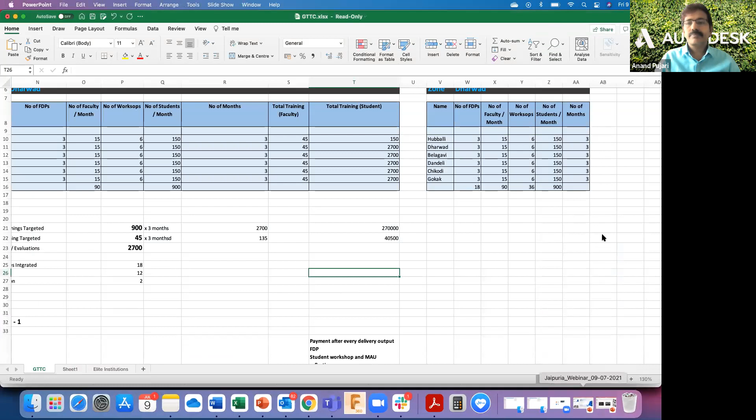Right, let me go to my presentation. Right, so my screen is on full mode, sir. Yes, sir. Yes, sir. Great, thank you.

All right, good afternoon. As many of you have just heard, Pritham sir has briefed about my profile. Again, I repeat, my name is Anand Pujari, and I'm education account manager with Autodesk right now. With this division, for the last 3 years, I'm working with the education community.

Prior to that, I used to work in a department called ADN, Autodesk Developer Network Group, where I used to manage the third-party partners who develop applications on top of our products, because you cannot get everything under one product. There are so many people who want to customize the product, increase the productivity, or enhance the approach towards the product. So all that is being taken care of by our third-party community. Having said that, we have some open sources that will be utilized by our developer community to develop on top of Autodesk products.

So in today's agenda, the whole idea was to look at it from a design thinking perspective and how additive manufacturing is being considered at the industry level. I'm not going deep into those subjects because I'm not that expert in those areas, but I will give you how I connect these areas, because you already might be knowing about the design thinking process and everything. It remains common, so we don't have to go into those areas. I'm pretty sure you might be knowing about additive manufacturing as well, from where it started and where we stand. But what I'm trying to give you is an overall view of how the perception of the industry is changing with respect to these two areas or topics.

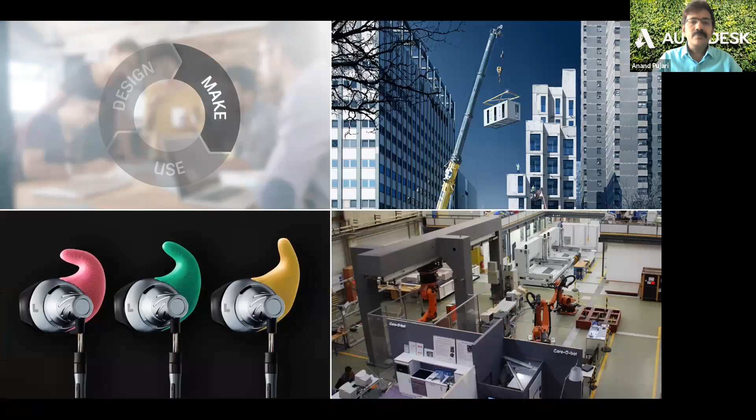Let's shift focus a little from the make, and what is happening in the make industry. We all are seeing this - many major cities are building roadways and highways very fast, especially with metros coming into picture. The construction industry is booming, and structures are coming up fast in less time. Now how is this happening? What is the makeshift, the change in the transition?

We are moving from a traditional approach of building everything on site. Gone are the days - now we are not going to start the structure completely from the base on site and keep building on that. That is the biggest shift.

If you look back 10 years, if a metro was built in Lucknow, or metros in Delhi, Bangalore, Hyderabad, or Chennai - previous projects took almost 6-7 years to build something like 5 or 10 kilometers of metro rail. Now it just takes months to build 10 kilometers of such things.

Why? Because the change in the make is happening with respect to prefabricated things. Everything is prefabricated now - that is the shift, the transition happening in terms of make.

Now the make, and any product, is coming so fast to the market because you don't have to build a huge factory - micro factories are coming into picture. People who are crowd-funded benefit as micro factories emerge, and that's where the make is changing. Then additive manufacturing, robots, and drones are coming in - I'll talk about those as well. These things are making production very fast, and products are reaching the market very fast.

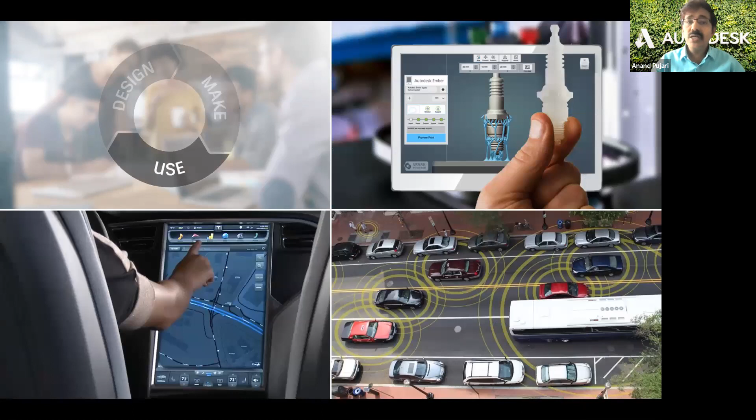That's the makeshift, and how the use is changing. Now the digital data and physical data are connecting, and the relationship between them is becoming stronger and stronger. The integration between the digital environment and physical data is becoming very strong. Now whatever you make digitally can be made into reality.

What you see on the top right corner is again a 3D printed component - moving from, of course you could do CNC manufacturing as well, and you could use additive manufacturing. So CNC manufacturing hasn't completely shifted to additive manufacturing, but the transitioning is happening in that direction. The biggest thing is, from the use perspective, this is really giving feedback to the designers, feedback to the makers.

Now you'll see that low cost sensors are becoming very important, because the sensor cost has gone down, and sensors are playing an important role. Sensors are being connected to the physical thing - it could be a place, a thing, or a device. These sensors collect data as and when required, at a repetitive sequence, repetitive stage, and feed that data back to the designers, back to the manufacturers, or back to the people who are monitoring those things.

So that is the biggest shift happening. With this data - till now we never thought about the data being so focused, but now every industry is talking about the data. That data is being fed back, and we are seeing more and more different kinds of variations, different kinds of products coming out.

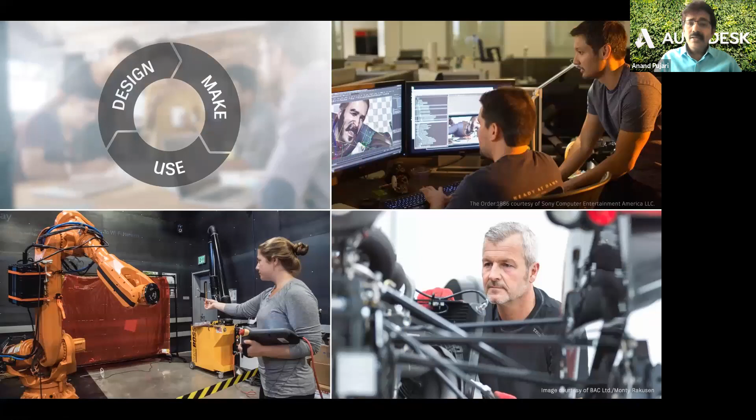And in terms of collaborative access, any kind of device to access - tabs, mobiles are becoming a big chunk. So many applications are being developed to enable that physical and digital interaction, and that feedback is becoming more and more important. This is where the change or transition is happening across design, make and use. There's a new set of generation coming into the market than the traditional people, and these new generations who are adopting these technologies, adopting this makeshift, adopting the change, are really bringing products faster to the market.

So this new generation is really effectively using the design thinking, the design processes, and different kinds of make approaches, trying to bring more products to the market. This generation is really adopting the technology. Now let me go back a little bit in history and take you through how this transition started taking place, from where we were to where we are headed in today's arena.

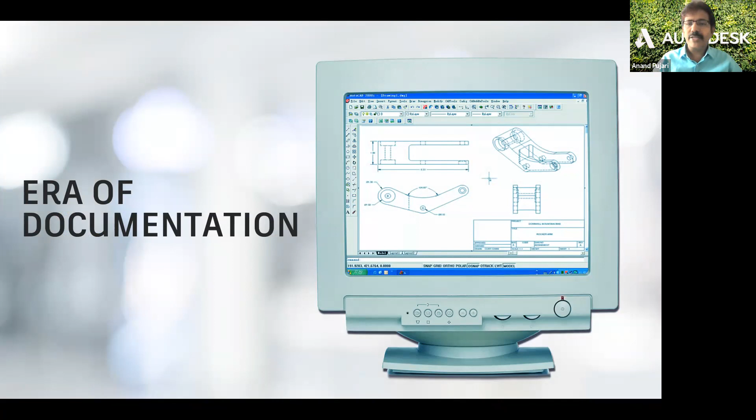We all know that we started with an era of documentation in terms of design. What that documentation means is that everything was on paper. Every design used to be done on paper, and of course there were good designers, we still have those designers. We still use 2D papers for our usage, be it on the shop floor or the construction site. So drawings still play a very major role.

But what shifted is the decision making capabilities. At that time, we used to use our intuitions, our experience, to make sudden or subtle decisions on site, and that required a lot of effort and used to be only from a very key person. So that used to take a lot of time. That was the era that we all dealt with.

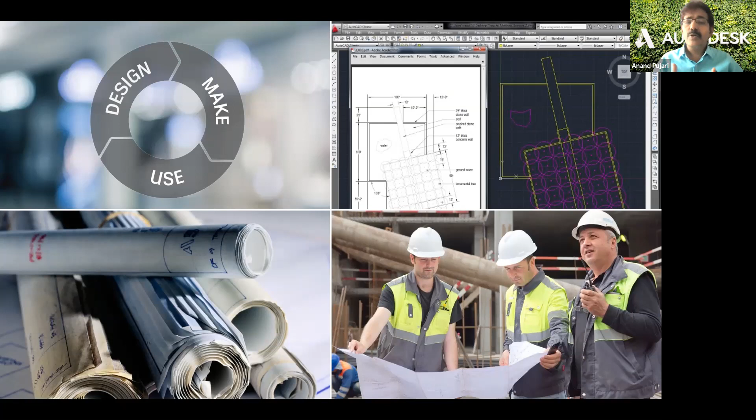Now how did we transition from that? Of course digitally we also had 2D environments. So what made us move from the era of documentation to the era of optimization? It meant we shifted from a 2D environment to a 3D environment. In a 3D environment, you realistically feel it, it gives very predictive information about the insights, the accuracy, the usage, and you really feel how the product would look like. That is the biggest thing that has been optimized, which was really difficult with a 2D approach.

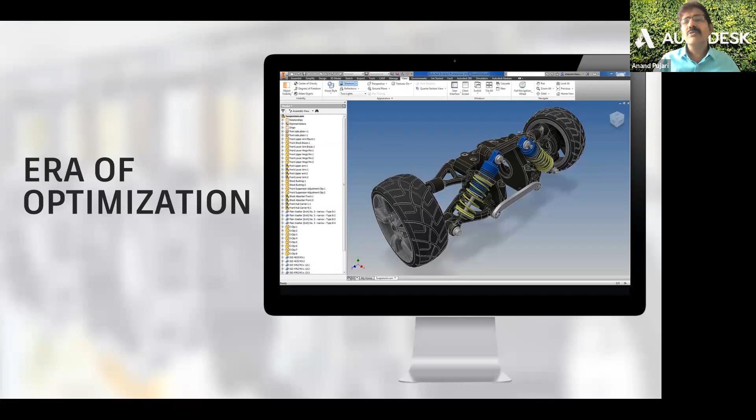How this is really helping designers is that with optimization coming into the picture, we would know how each product is talking to each other, how they're interacting and connected. This helps us understand where our flaws are, what approaches we need, what kind of changes are needed, and how accurate we need to get the product to market. So that's the shift that happened from a 2D environment to a 3D environment, where we focused more on optimizing our products.

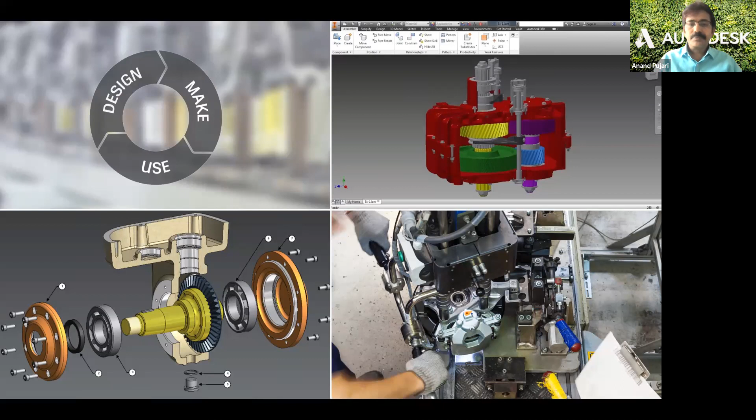But now is the era of connection, the era of collaboration. The optimization still remains, but we're taking it to the next level by bridging the gap between the physical and the digital, building a stronger integration between them. That's where optimization is more focused on making products talk to the users and to the manufacturers. I mean not physically talk, but the more users use it appropriately, the better feedback is given back to the manufacturers, makers, or designers. So now is the era of connection or collaboration.

How this connection is working: at the construction site we've started using drones, which give us a different kind of feeling or approach in terms of design thinking. It gives us progress tracking of our projects, like how much time it takes to complete, and the timeline is reducing very fast. What you see at the construction line is better control with respect to design.

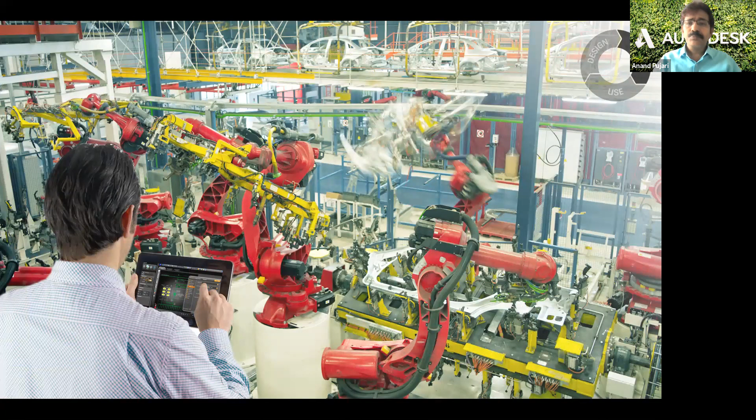Not only in construction, but in the manufacturing industry too, we see robots coming into the picture. Many robots are used in assembly lines to do their jobs, drones are being used, and higher technologies like generative design are being used—I'll talk about generative design a little later. Micro factories are also coming. So this is a transition from the traditional assembly line approach, changed from a digital end. Everything is interconnected now.

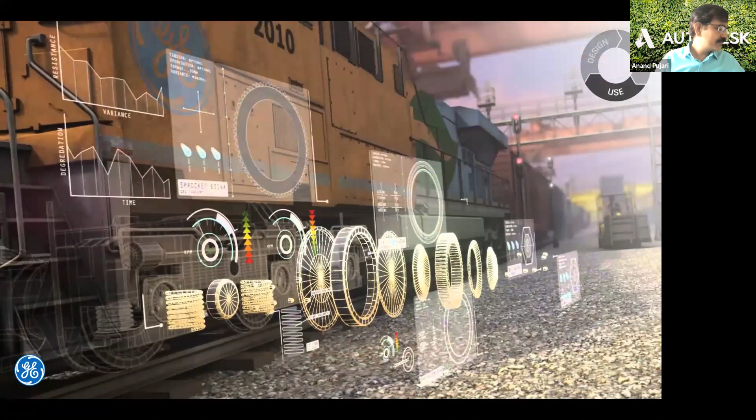I would give a very good example here with respect to GE. Here what you see is an intelligent cruise control system that GE adopted. What this does is that cruise control system has sensors placed at regular intervals where data needs to be collected back, and feeding that data back to the rail engineers has helped them save hundreds of millions of dollars in maintenance cost.

Predictive maintenance is very important these days, before the actual product fails, because once it fails, the whole engine or equipment or factory has to be shut down because of one failure. So we need predictive maintenance, and that can only come into picture by adopting these things into our assembly line or into our design.

So sensors which gave feedback to the engineers were able to fix those problems well in advance, and they were able to save a lot of cost in terms of their designs as well as their manufacturing. That's one example. And as I said, this is an era of connection.

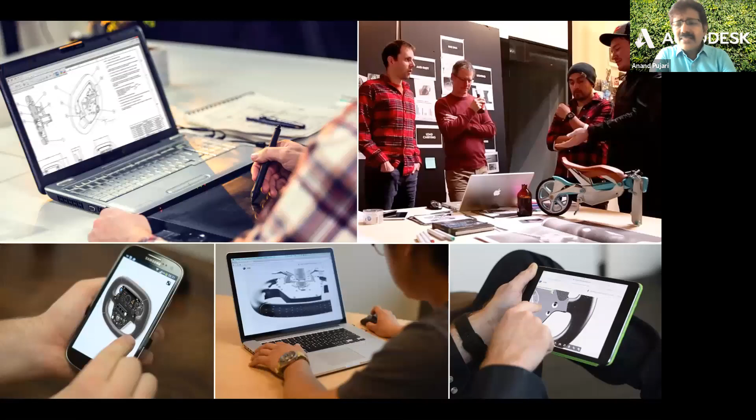My data sits at one location and I'm able to access it from anywhere through any device. How is that helping? For example, if I'm working on a project, and a very similar project has already been developed somewhere in Europe, US, or APAC, then we can easily collaborate with them through these technologies. Rather than reinventing the wheel, why not talk to that person and understand, and if we can collaborate on the project, that makes life easy.

We don't have to spend too much time. Data transition is becoming easy with cloud computing, and the products being designed are coming very fast to the market. That's why we call this an era of collaboration, an era of connection, and we have to incorporate these things into our education system as well.

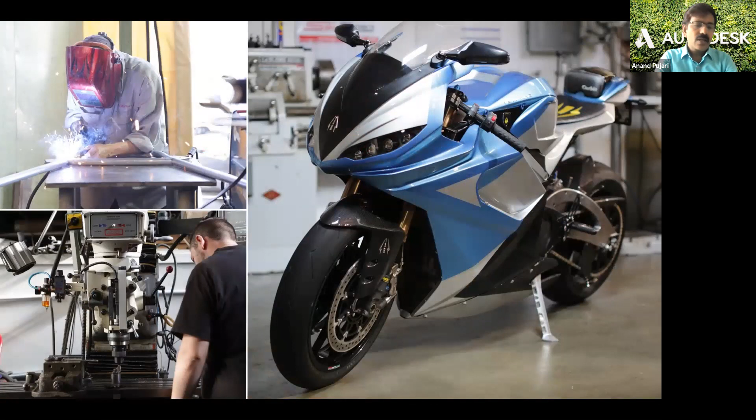Here is another example. This guy, Richard Hatfield, is very fond of motorcycles. He wanted to build a motorcycle, and this is nothing but a battery operated motorcycle, compared to combustion bikes. He wanted to maintain the same speed and capabilities to win competitions against combustion vehicles used in the racing industry.

And trust me, he has just an 8 to 10 member team. With that, what you see on my right side is a bike that has been fully designed as an electric bike. They adopted all these different approaches. Some of the components you see are nothing but additive manufacturing with generative design. Some components were generatively designed - I'll talk about what generative design is all about.

That's a different designing approach that has been the talk of the town in today's world. With this approach - additive manufacturing, the thinking of the design process being changed - he was able to get this product faster to market. This bike has already won a couple of competitions as well as awards because of its sleek design and battery operated, completely sustainable design that every industry is looking at. That's a very good example of how people are moving from a conventional method of manufacturing to a different approach.

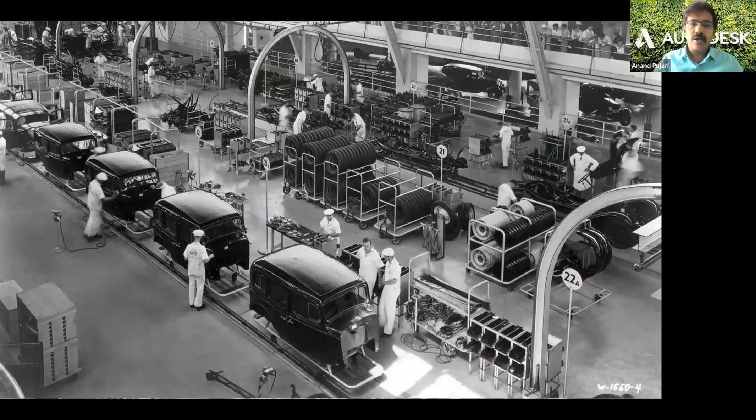Let's talk about an industry we all know about - the industry of weight. This industry talks more about weight. If your vehicle is heavier, you have a lot of issues with respect to fuel consumption. Most industries in the automotive sector are trying to reduce weight as their biggest challenge, but still maintain the factor of safety, driver comfortability, and accidental impacts. Safety matters. So in making all those things, what you see is an assembly line of General Motors.

Okay, and traditionally over the years, General Motors is now 100 years older. Over the years, General Motors have always adopted newer technologies in its assembly lines and factories, because their biggest challenge is to optimize their assembly line, optimize their car manufacturing, optimize their designs. So to optimize, they have to adopt newer technology.

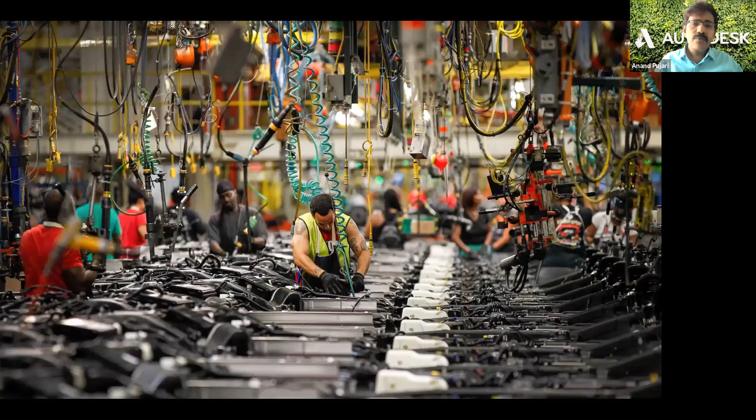Now what we see is the same. It may look little clunky, but trust me, one car has nearly 30,000 plus parts. Today General Motors, from an assembly line, for every minute a car comes out from the assembly line. Now how is that happening? It's because they have taken the optimization approach in their assembly line as well.

So that's where they are adopting the newer technology, and that's where they are able to get a car out of their assembly line in a minute, by having robotics, drones, and these manufacturing methods. So that is the change happening, and companies like General Motors are able to adopt those things in their workflow.

Now if General Motors just stops there, saying we are good, we are getting one car with 30,000 parts out in a minute, and our sales are also good, so do we stop here? Should we be satisfied with the market capture as of now? That is definitely not the case.

Now General Motors are looking ahead, and they are aggressively thinking of bringing electric vehicles into the market. This year and the next year, by 2022, they have targeted that they would get around 20 to 25 electric vehicles to the market.

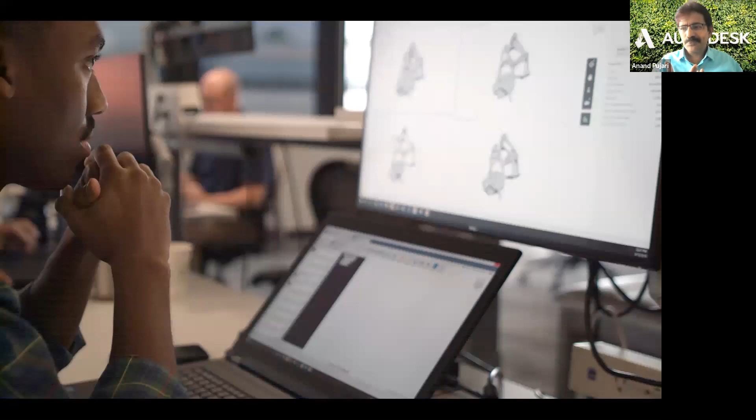Now if electric vehicles have to come into the market, they have their own constraints or issues. The biggest challenge is what would be the mileage and what would be the battery capacity. How much should the battery weight be, what should the vehicle weight be - that is one thing. The third is safety matters, because road safety is very, very important. So these are the major things they have to consider.

Now all these can be achieved if they adopt the right technology at the right time and start looking into those areas. That's where technologies being talked about at the industry level, like generative design, come in. I'm giving you an example of what is right now a buzzword in the industry. As I mentioned, we have seen the era of documentation, optimization, connection. Now in optimization, we are going a step ahead.

Now let me tell you what this generative design is. Generative design is nothing but what we call a design exploration - it's in the name itself. Let me explain it in a different way.

So right now, what we are doing is a very passive design approach. What do I mean by passive design? Everything is there in my idea, in my mind. I only start from the conceptual design, I only think how the product would look like, and the designer does everything. What he's doing is just giving feedback to the machines, and the machine is giving an output - that's the approach.

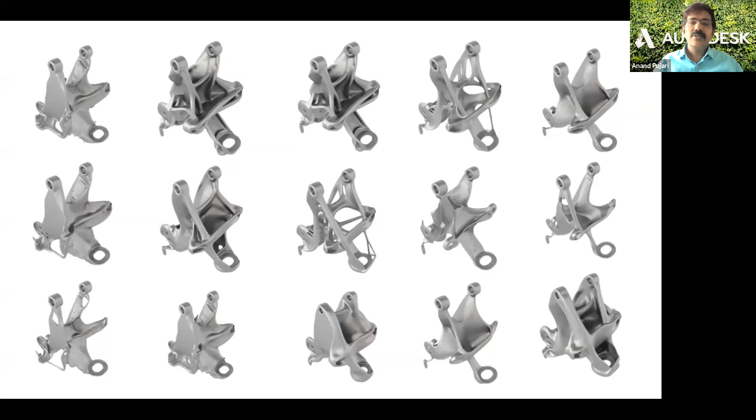That's where cloud computing comes into picture, whatever we call it. It's the era of cloud, right? So people thought, why not challenge the machine itself? I give certain inputs to the machine, and the machine would understand my inputs and give me different variations of the design. And of those different variations, I would take the one that best suits my thing. That is where you will see people started taking that approach.

Industry started adopting this. General Motors was the first to adopt such technologies into their arena, saying, let's not waste time, let's use this computational power, or what we call in today's acronym, machine algorithm - machine learning. So we are challenging the machine. People have started developing algorithms which will give me the capability to challenge the machine. I give certain conditions, certain inputs based on my design, and it will throw me different variations, different variants. Of those variants, I will choose one that suits my need.

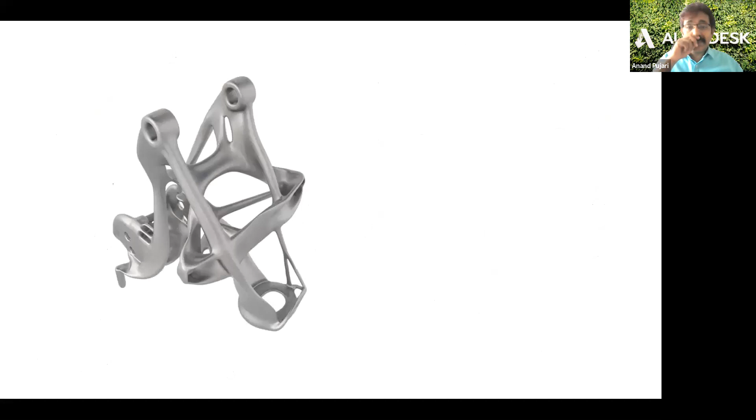And the advantage of that, as well, is like what you see on the right side. I'm hoping you will correlate what this picture is all about. This is nothing but a bracket assembly of a car seat belt. If you have seen that, you pull a seat belt and plug it into your car - this is nothing but a bracket assembly. This contains 8 different parts, and you have to have 8 different vendors to supply this. You have to assemble so much.

With generative design coming into picture, that is being transitioned from 8 components to one single component. And the best part is, I would say this would approximately weigh somewhere around a kg or half a kg or something, but this would be in terms of grams. So there is a reduction in weight, because if you imagine General Motors is able to adopt this technology - weight reduction is one of the biggest aspects of the automotive industry. For one part, if you are able to reduce the weight to this drastic extent, imagine for 30,000 parts, if you are able to reduce the weight. And trust me, this is more stable, sustainable, and stronger in terms of its factor of safety. But the design is very complicated.

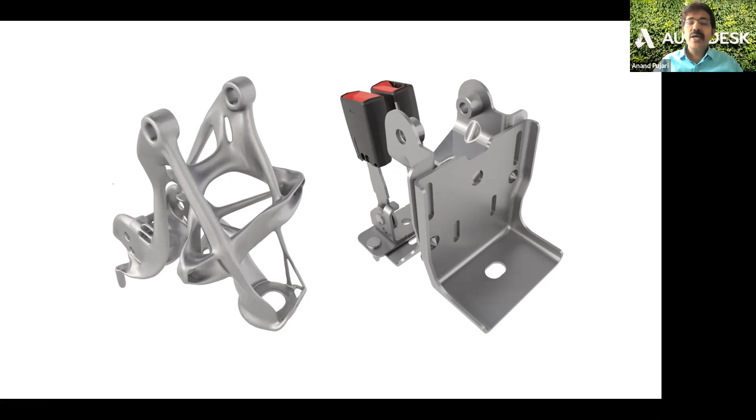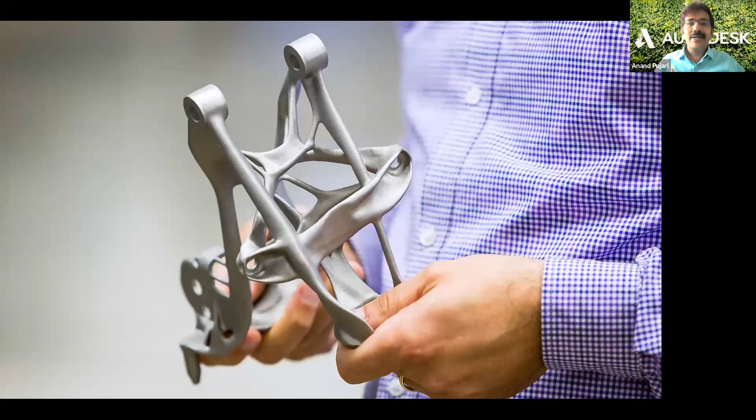This is where additive manufacturing comes into picture. What you see is that traditional manufacturing approach is not possible for this product as of now - it is nothing but only 3D printing, and they have used metal 3D printing to get this product, and it is being used in the car. So that is one approach. Finally, they thought this is the best design that suits their need, and then they were able to adopt that.

And what were they able to achieve? They achieved a 40-45% reduction in material usage, or 30 kg lesser in overall weight. Let me go back a little bit.

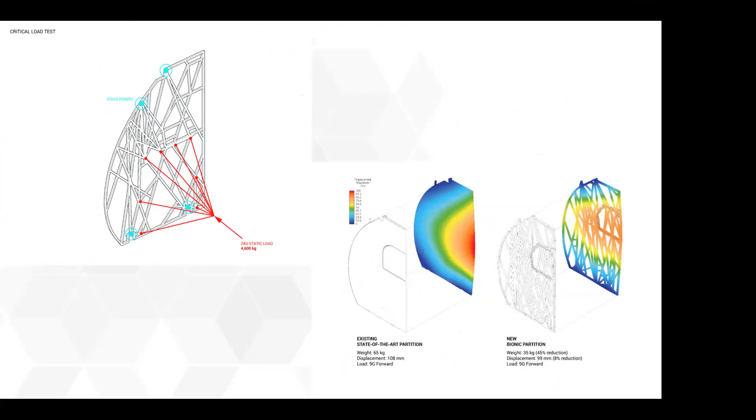How does that all happen? You can see here the existing state-of-the-art partition, which is a solid body weighing 65 kgs, with displacement of 108 mm under load. But the bionic one is like 35 kgs, a 45% reduction.

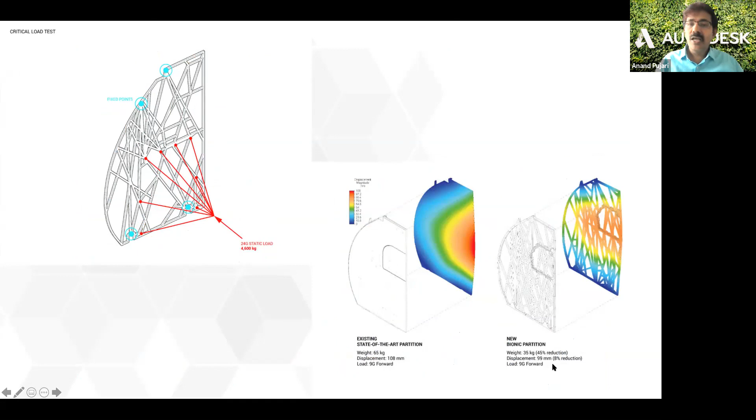Now you may say, what difference does making these things make? One of the biggest factors for the aero industry is weight reduction. The more the weight reduction, the better for them, while maintaining the same capabilities and structural study. So what they have done is throw that challenge to the machine.

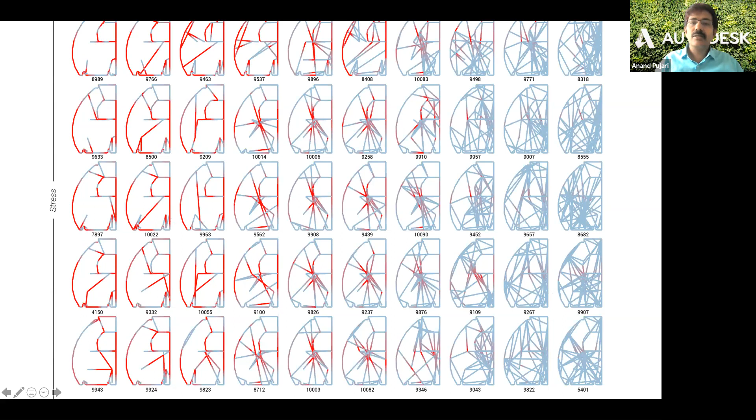The machine has given them all these variations with respect to the materials that have been chosen, and based on this result, whichever suits them, they have taken up that option.

So what difference does it make? Material is one of the big factors, because sustainable design means we save our planet, we save our earth, since ours is an exhaustible resource. All industries are looking at saving more material and coming up with a better design - that's the best approach in terms of sustainable design.

The second thing is, with that, what they were able to save is on fuel consumption. Just by this change, fuel consumption of the airplane - they were able to save 450 tons of carbon dioxide emission. That much emission used to happen, and because of this change, they were able to control that.

And that exhaust reduction is equivalent to 96,000 vehicles running on the road. So you can imagine, with a little change in the design process, they were able to save so much.

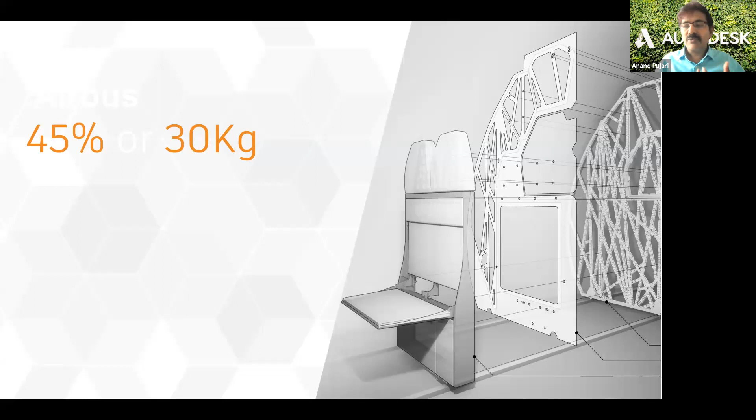So now you've seen a couple of things in the videos - even NASA is adopting these technologies in their workflow. From the commercial side, I'm coming back to the academic side, where the same concepts are being applied by our own students.

I'll tell you, this is an example from our student at Dayanand Sagar College University in Bangalore. They looked at generative design in one of the events that students were participating in, looked at the approach of design through generative design, and said, we have to bring this in.

What we made is that generative design technology use is a cost to the company, and I'll tell you why. The computational power - right now we don't have our own computational servers, we rely on Amazon servers or Azure Microsoft servers. The computation has to happen in the cloud now, not on the local machine, so per computation, we have to pay to the Amazon servers.

But in spite of that, what we thought is, let's give this free to the educational community so they can adopt this technology and play around. Because from an Autodesk perspective, innovation comes from two people only - the advanced level who are adopting new technologies, and the academic level, the kids, the students, because they think out of the box. So that's where these students also thought.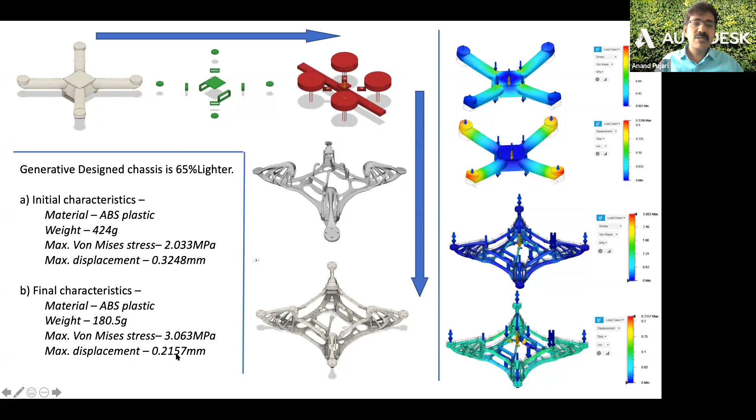Now, this is the actual product that was 3D printed, and it flies. I have the videos as well. It was showcased in multiple events of Autodesk, and they had two variants, but they actually came up with four different variants. One is for the aesthetic look, one is the stronger one, another is like a material thing, and something like that. This is completely done by 6th or 7th semester students.

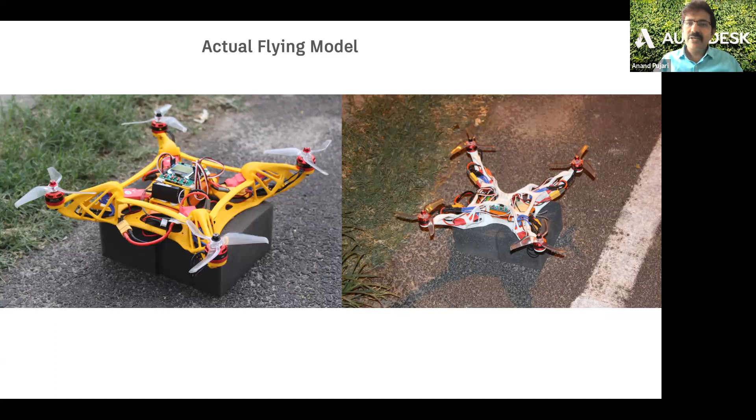Another project from the same college, Dayanand Sagar. We somehow came across this accidentally with this kid, this student is an electronics student, with no knowledge about design, no knowledge about how to make his product. But with his electronics background, he was able to make this rover bot, and he won two competitions. He was the first winner, with the first prize.

But look at his design approach. No thought process. He used PVC pipes in his design, cables running here and there, but that's his approach. As designers, we have to think differently.

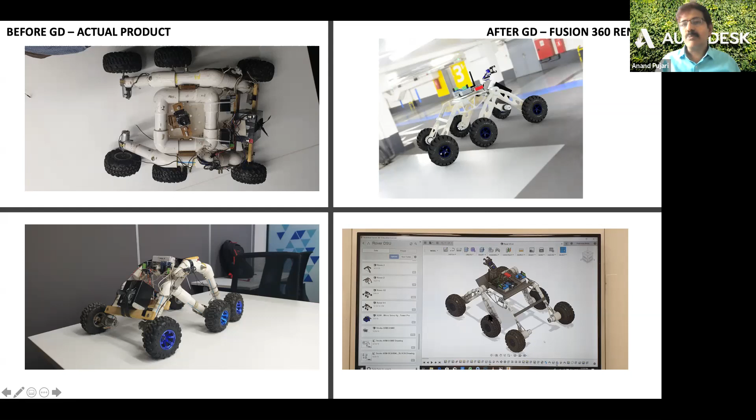So we transitioned this approach, collaborating both mechanical and electronic students, applying mechatronics concepts and generative design. This is what you see on the right side, a complete transition, and this is the actual product now, showcased to many people who appreciated the effort by the students. So crisp and clear, all cables going underneath, the arms, the movements, everything perfect.

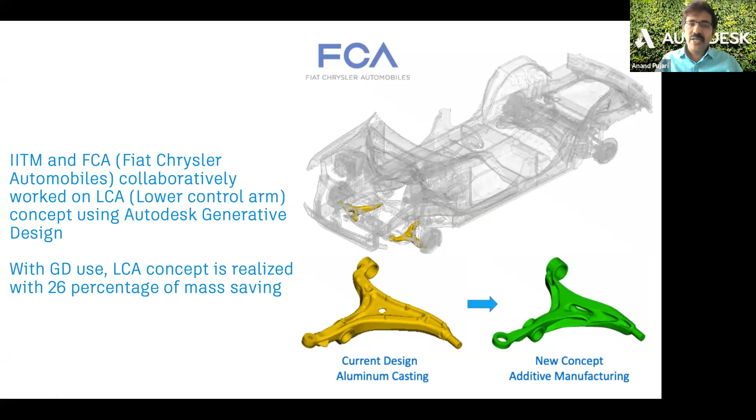Industries like Fiat Chrysler are also applying generative design. What you currently see is an aluminum casting, and this is a new concept of additive manufacturing they're looking at. It's under a pilot program now. If this gets approved by their industry, it will go into these locations in every vehicle of Fiat. What they achieved is 26% mass reduction in their components. That's a huge sustainable design. If you go for mass production, you can imagine how much material they will be saving.

So I'll tell you what this differentiator actually is. We have to come up with more and more designs and products to the market that can meet the needs of consumers and users, with less impact on our planet, with less material, and better products to the market. That's what has to be approached in terms of our design thinking, our design approach, and our make.

So here I'll take one quick example. Now industries are asking us, we want to be part of this approach, we want to build products at a lower cost, sustainably, while maintaining all the capabilities, and get products faster to market. So we're not talking about one product or one software, we call it a platform, an innovative platform. If you have to meet these needs, you have to adopt platform technologies.

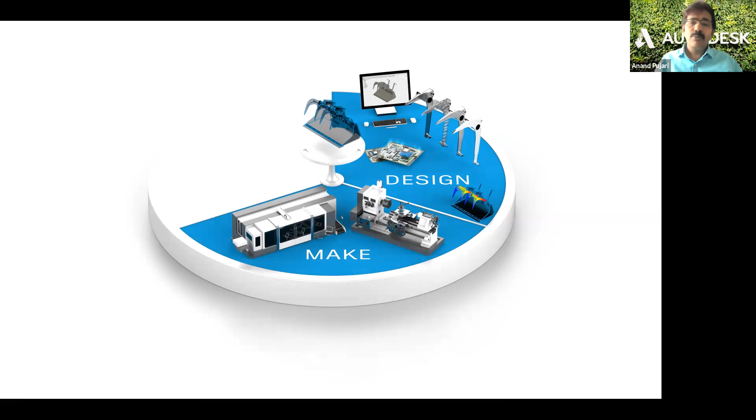Now let's understand design data as the center part. How do we deal with design data? You have technologies like Fusion 360, Autodesk Fusion 360, Autodesk Inventor, Max, Maya, so many products which handle the designing part and the simulation part. You can even extend it to PCB designing. With seamless integration, you can transition from design to make without data losses, so your make products can be very efficiently done, along with the use cases as well. As I told you in the initial presentation, the gap between these three is reducing.

The feedback given by the user community goes to the designers, and the products come faster to the market. Beyond that, there are high-end equipment tools. We have products like Netfabb, as I told you, and Revit, which can be used for your advanced levels of designing.

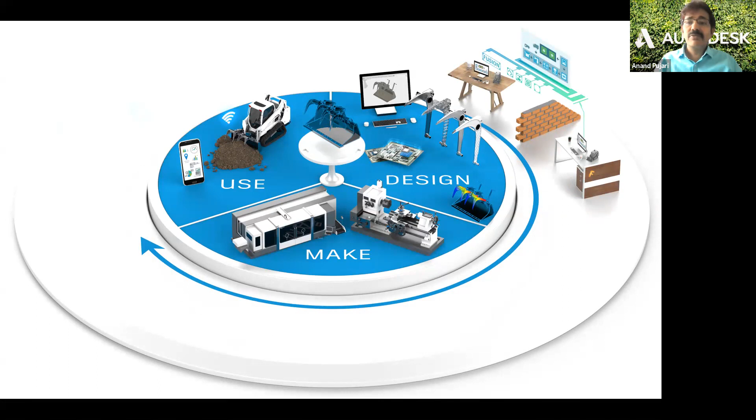PowerMill, advanced manufacturing technologies are there. We have a set of power mold products being used by the industries. So when I mention these, I'm not pitching our products because I come from Autodesk, don't think that's what I'm doing.

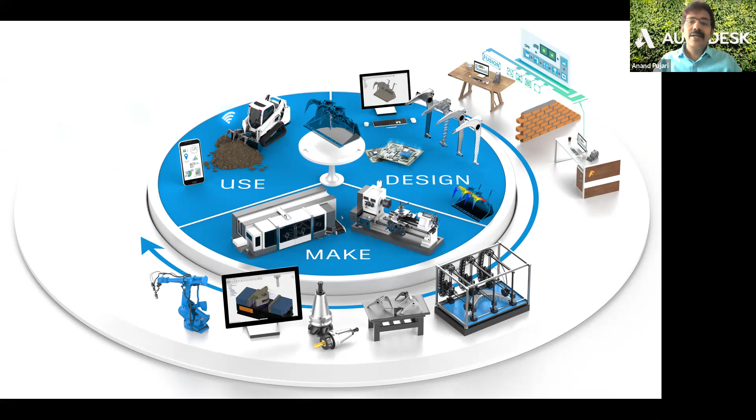Please understand the concept or approach the industry is taking, and why we have to tell about this is because it's an innovative platform. When we give this platform to education, the student community, or to industry, they don't have to hop from machine to machine. This approach gives them a faster product to market with less material while maintaining sustainability. This is where one of our products from last year, Autodesk Fusion 360, came into picture. It takes you from conceptual design till fabrication, everything under one product, so the student, startup, educator, or company doesn't hop from one machine to another.

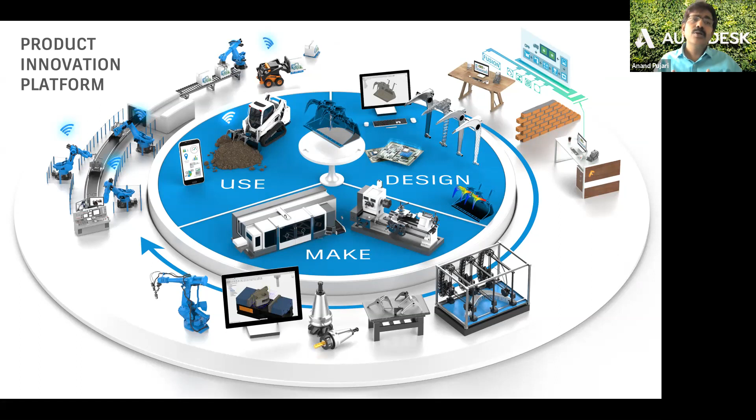That is why design data plays a very important role. You cannot go with just a software approach; you have to go with a product innovation platform approach. And I come back to where I started: all these are interconnected. Your approach is interconnected, your design thinking is interconnected, your make is interconnected. Design, make, and use, we talked about in detail.

But this center part, the remake, is where every company has to relook. Because if you don't, as of now, 70% of the materials developed under the automobile industries are not effectively used. They may have to go back to reusage again. So if you look at it from a sustainability angle, remaking from existing things as much as you can is a very good design approach or design thinking to bring into your arena.

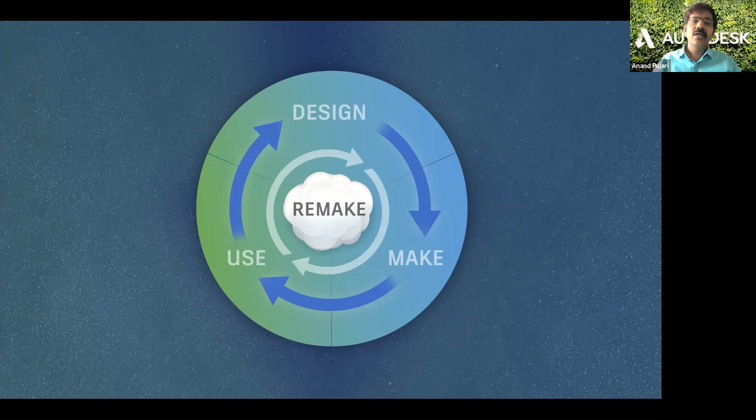Okay, I shift from my industry approach to education right now. By 2020, of course we've already crossed that, this is a slightly old slide I forgot to change, there will be 95 million opportunities in the manufacturing sector itself.

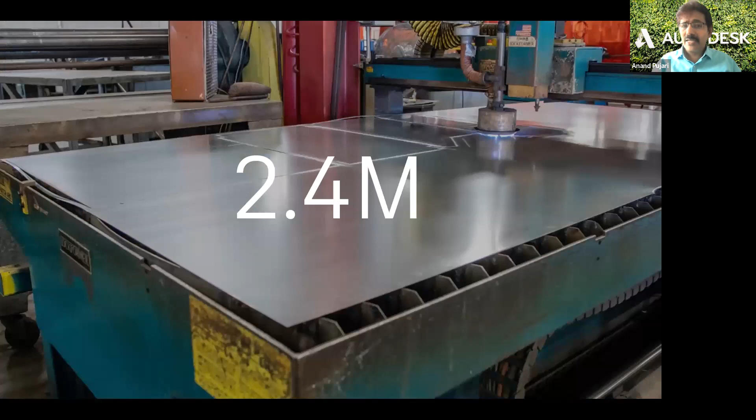I mean job opportunities you will find. Of that, only 2.4 million will be available in the American countries. You can imagine the rest of the world. Now why is that happening? Because a lot of people don't understand the importance of this approach.

There is a huge aged population going to retire, and we need to help the younger generation take over those things. To help the younger generation take over those places, they have to be equipped with these technologies, design approaches and thinking. So we have to train them. And the best part is we have a huge chunk of population to support or help with this.

So 2.52 billion fall under a category who are very tech savvy. This generation is very tech savvy, they understand technology very fast. So we just have to groom them.

So what Autodesk thinks from an education perspective comes down to three things: we have to inspire the students, we have to engage them in these technologies, and we have to prepare them for the industry, make them ready for the industry.

Now many in mechanical or construction fields don't understand this. People are moving toward thinking the white collar job is the best job. Many, even though they learn mechanical, civil, architectural, or industrial engineering, everybody goes into software testing or software development kind of work. But why? Because these students are not aware of the importance of this, they are not aware how the process works, they are not aware how the technology works.

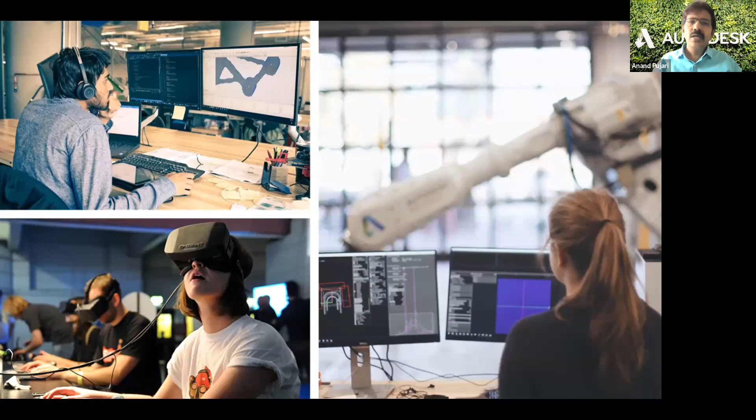How Autodesk is doing this: first, Autodesk brought cloud computing into the picture, because if you are not adopting cloud technologies, then you are gone. Virtual realities are coming everywhere - AR and VR are playing an important role. And on the right side, additive manufacturing is another thing.

So all this collaboration, all this advancement, bringing it to the education community will help us make students or make the industry ready so that they can take a very lucrative job in the industry as well.

Now, just for your information, we have around 8+ million student community users under our communication, and 100+ million professional designers who think about products differently. And last but not least, tons of resources are available on our website, freely available.

And the best part of Autodesk is, 10 years down the line, I wouldn't call it free software - we decided to do it as no cost. We stopped selling it to the education community.

What we see is that if students are able to adopt these technologies, if institutes are able to adopt these technologies, and if they go back to the industry and say, hey, I used these products which were very comfortable, very good design software that increased our thought process - the industry can adopt those things. That is the win for Autodesk, in the longer term.

But here are tons of resources. We have design academies, the learning resources. We have help documents to help understand things from a design perspective. So please ask your students to go to these areas, and they should be able to adopt design thinking approaches and design-and-make approaches.